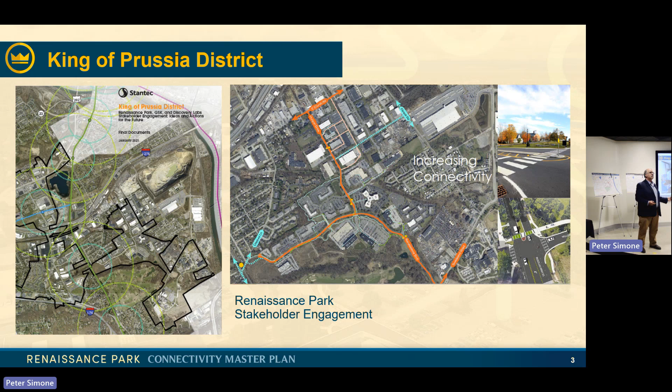If you're wanting to see the results of that study, you can go to our website at visitkop.com and click on the What We Do tab, then also click on Publications. There's a report there by Stantec, the consultant on that, and I recommend that you visit that.

One of the things that came out of that study was that they were interested in seeing Renaissance Park get a new brand, a new logo, new signage. So we worked with a focus group to come up with a new logo for Renaissance Park.

Which you have seen if you're coming in at any of the different gateways. We tried to reference King of Prussia itself through the design, but at the same time also allude to the vast number of different technological life science companies that make up this exciting area within King of Prussia.

This is the actual brand that they came up with, the logo. D2 Solutions was the name of the group that provided that. They're actually a company here in Renaissance Park, and they came up with it.

We also worked with Stewart Associates, a local landscape architecture firm, to come up with more planting beds along Renaissance Boulevard and the gateways. And we've been implementing those since 2020.

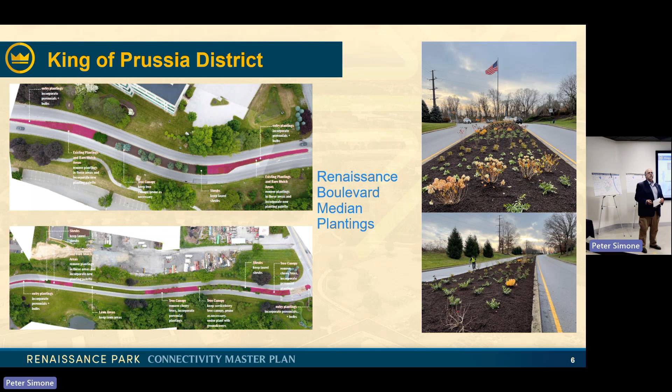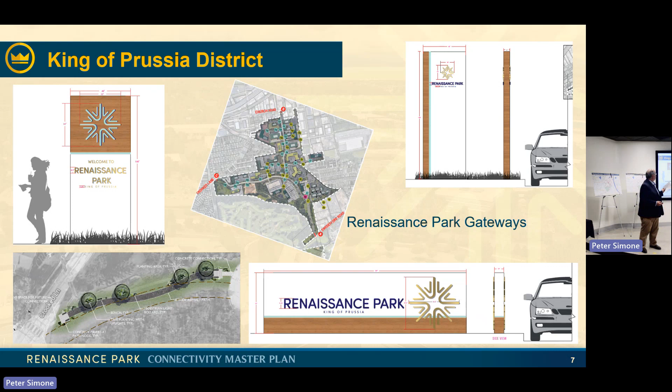And then D2 also came up with some additional signage for the area. We wanted to make sure that people were clear on where they were entering when they came into Renaissance Park, so we created the gateway signs that you see out there now.

Three gateways: the two gateways that have been there for a while, and then a new pedestrian gateway that we wanted to bring attention to, so that commuters coming in from the surrounding neighborhoods, or actually from Hughes Park Station, would know where they were supposed to be walking to.

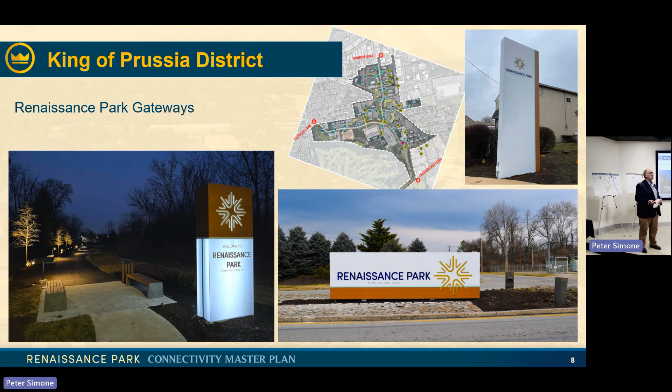The next phase of that signage project is going to be directional signage that's going to be built and installed within Renaissance Park itself, just to outline where the actual buildings are. It can get kind of confusing when you're going through the different driveways.

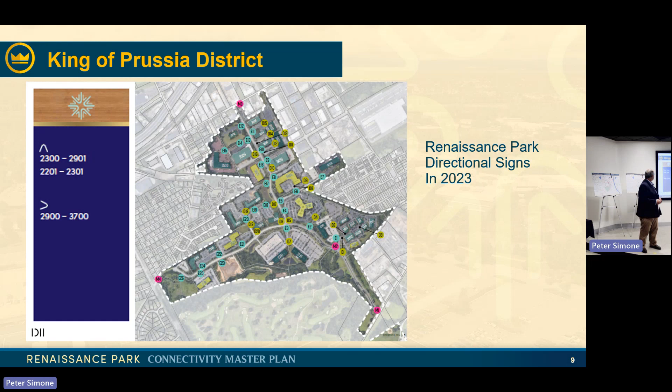And then we also hold a number of different special events and add some additional amenities. So the past few years, we've been having some food truck Tuesdays in Renaissance Park, as well as Wellness Wednesdays. And we also just installed a new beehive down by 2901 Renaissance Boulevard, and we'll be having some programming around that as well.

We also look at additional amenities that we can add to the area, including recreational amenities like an outdoor ping pong table. That's something that we've added in Moore Park, and it was very popular, with ping pong tournaments and pop-up beer gardens that we had at that location.

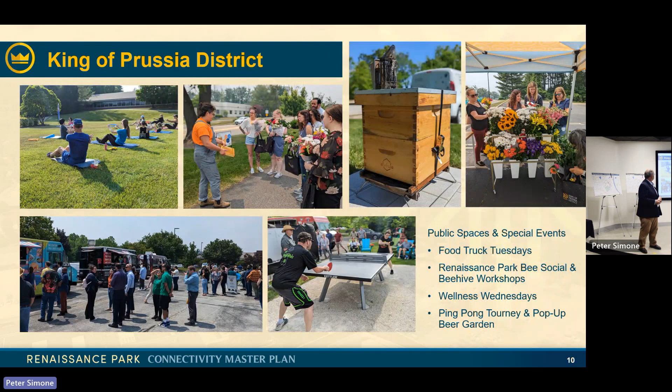So that's just a little bit of background. The other primary area that the stakeholders, the property owners in the Renaissance Park area, were interested in was pedestrian connectivity.

And so that's when we went out and hired Simone Collins to come up with a new connectivity study, to outline not only just for the property owners, but also surrounding neighborhoods, to find out what connections they would like to see made to Renaissance Park, throughout Renaissance Park, and how those connections can be made to the adjacent neighborhoods. So with that, I'll turn it over to Pete Simone, and he'll properly introduce his team.

Located just across the river in Norristown. We've been there since 2010. Some of the things we try to do in every project - we do a number of different types of projects. We've done over 120 or 130 trail and connectivity projects. That's a lot of what we do. We're sort of an old school landscape architecture firm. We do parks and trails and zoning and planning, site design, and all those good things. We did Wilson Park 20 years ago.

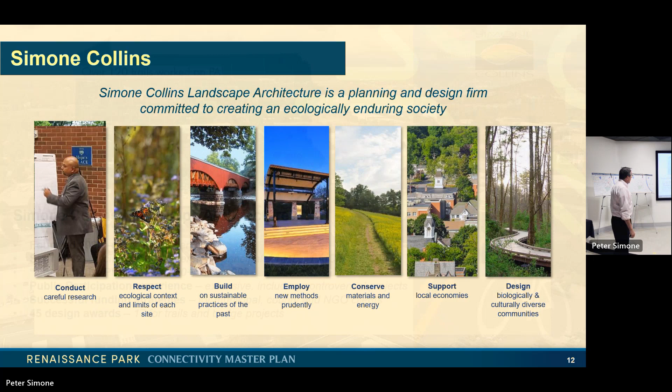This is, as I mentioned, we've done a lot of connectivity work. See the dots on the map, places that we've done. Shot of the bike lane in downtown Wayne that we did a couple of years ago. The Radnor Township project connected the school with the high school, with the downtown, and the existing Radnor Trail. Different types of trails tonight, so you understand - we all have the same understanding of what a trail is, because when you say trail, everybody thinks a different thing.

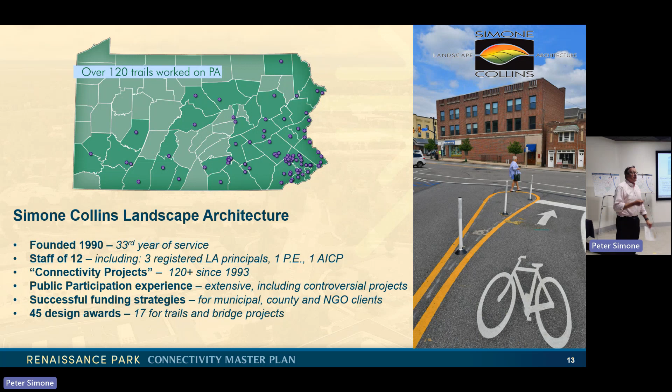And our partners, traffic planning and design - the traffic engineers are one of the most well-known regional traffic engineering firms. We work with them often, and they'll be looking at, especially for roadway intersections, how we're trying to get pedestrians and bikes over those safely. And as Chris mentioned, even though Renaissance Park is a limit, we're going to look outside those limits. We can't do this in a vacuum. It'd be silly to do a trail in the park or a sidewalk and not connect to something outside.

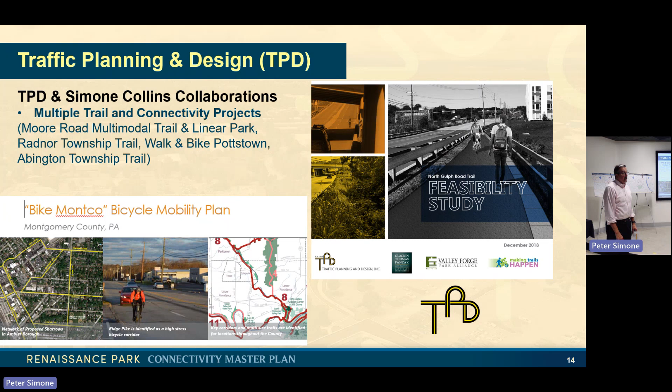And there's a lot of exciting things happening in the area. I should mention, every year Pennsylvania does a state recreation study, and by far, trails and walking are the number one most wanted facilities and the number one activity that people want to do recreationally. So it's happening all over the state. With that, I'll turn it over to Anita, she'll take you through the scope and a lot of other hopefully interesting things.

Good evening and welcome, and thank you again for coming out. At least it wasn't raining for us, right? That was our bet on how we get everyone out.

As Pete said, I'm a civil engineer, joining very talented landscape architects. And I've enjoyed working for Simone Collins for 2 years with great clients. I do have to put a plug in for the district, because this is the second project I've worked on with the same team, the Moore Road project. And there's an energy about the district, as there is about Upper Merion in general. So it's great for us to be back and participate.

The scope of the project - I'm going to take you through basically a plan, a connectivity plan, a plan that is used for planning. It certainly can't be built from, right? It's not a construction document, but it takes a look at where we possibly can make connections for pedestrians, for bicyclists, while taking into account the entire picture of Renaissance Park, which changes, which has its challenges, which is nestled in close to residences. It's such an interesting study - the more Geoff and I look at it, the more interesting it becomes. And we'll show you some fun slides about that. So the final plan is a connectivity plan.

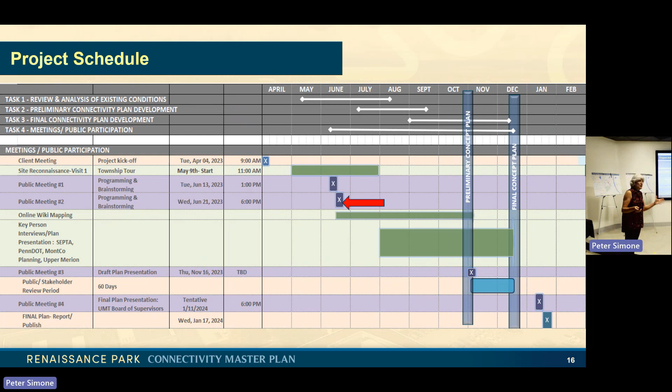Titled data and inventory - this goes back to the concept I mentioned about planning that's been done in this area. What you see on the bottom of this slide really represents the important documents to start with: the Upper Merion Comprehensive Plan. This is planning area 9, Swedeland, studied by Safe Routes to Transit by the Delaware Valley Regional Planning Commission. So Hughes Park Station is a key priority to us here in this study. They've looked at it - it's 2017.

As Chris mentioned, Stantec took all the ideas of the stakeholders back in January of 2020 to publish it in 2021, DII. So to get back to what the comprehensive plan says in Upper Merion: pedestrian connections, whether sidewalk or trail, should be enhanced in order to provide safe pathways for people moving in and out of the Swedeland area. Connections between Hughes Park Station and Renaissance Business Park should be improved, setting the tone for what this area has the potential to be.

It's such an unusual historic area - so many geological factors, railroad factors, just really interesting - going back to the roots of what it is and now making it work today, with the challenges property owners have, the economic times, and how they use their properties, the changes between commercial and residential. All of these are the factors affecting Renaissance Park. So this connectivity plan has to be sensitive to that, and sort of look at it from all angles with all the input from the stakeholders.

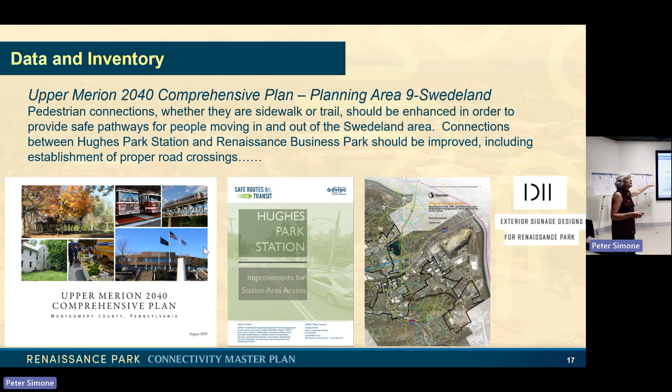Going back to the Stantec study that Chris mentioned - getting together all of the stakeholders for a three-phase study. What are the opportunities and the issues that they're facing as tenants, property owners, or residents? What are your ideas? What's the vision? What would you like it to look like? Number two - and what came out of it was a draft vision.

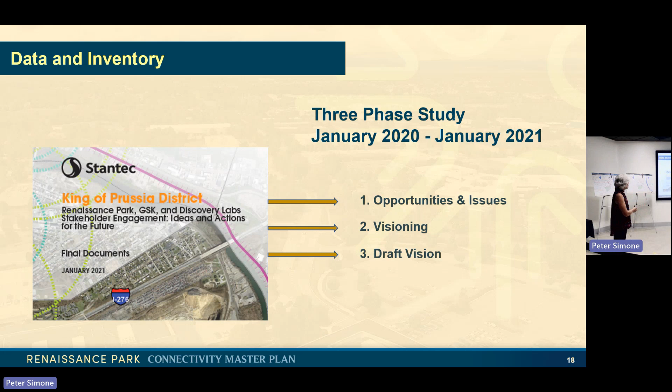It was good. It's a great report. I definitely encourage you to take a look at it because you can really see the specifics of it.

They also had the results of their public opinion survey, very detailed. Placemaking, as Chris mentioned, is something the district jumped on right away - the importance and beauty of place in the community, the importance of land use mix, and increased amenities were definitely very high on that survey. People's responses showed they'd like to see more things here, more food, more activities. The very last one, connectivity, was included as a large part of making those other visions happen - increased connectivity. Getting this project underway is that vision.

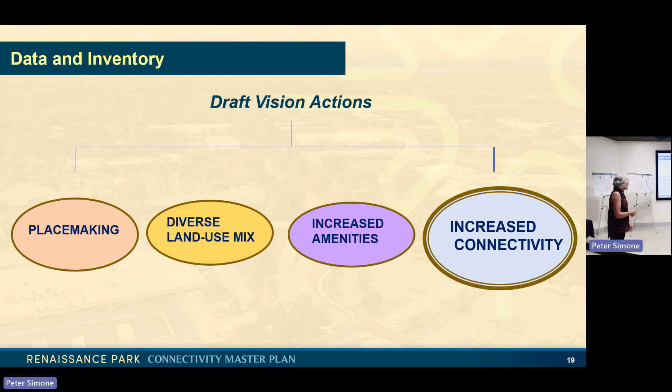Increased connectivity, again back to the Stantec report, 6 items, and there they are. Increased pedestrian infrastructure on Renaissance and Horizon Drive, more crosswalks and bus shelters, road connections into the district like Crooked Lane or other locations, extending Renaissance Boulevard across Swedeland and somehow over to River Road, and number 6, shuttle service.

I think this is really a good time to talk about what this study is that we're doing. Did you have a question? Talk through item E.

Absolutely, and again these were just - because I see like the bus shelters, there's quite a few around here. I'm just curious what drove that. Like 3 or 4, right? And that will change too, because SEPTA is proposing to change their routes, but within a very short distance there's a lot of those. Don't know the full story about that, but certainly.

Well, I guess just briefly mention that - updating the shelters. So the shelters themselves, not actually adding more, it was more of just updating them to something that looks nicer.

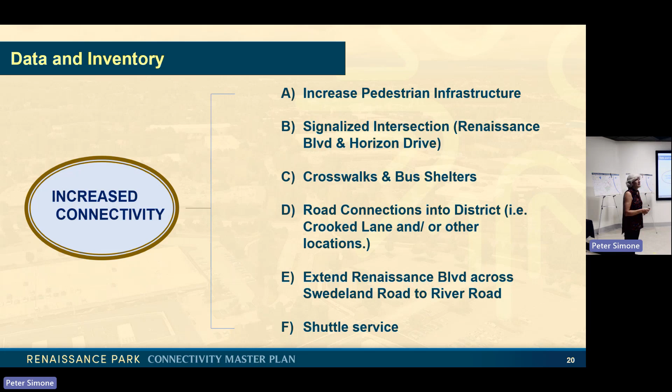We started off as a team, just an internal team, on our site tour on a beautiful day. We've had some really lovely days this spring. So I'm going to turn it over to Jeff now to take you through what really popped to us that day when we were out there, and that leads us into the rest of the discussion about our analysis, where we are, and Jeff will take us through a primer of how we're going to use a toolbox to look at Renaissance Park.

Jeff, thank you. I'm just going to dim the lights now that we've all had food and everything. How come I didn't get dim lights? You're gonna do it.

All right, so right now we're going to take a look at just a couple of photos of things we saw. I want to show you what we see as designers. Right here, what do we see when we came through here? We saw a really mature, well-groomed landscape. It's pretty, there are some really beautiful parts in there. Sure, it's a business park, but this is just a straight up photo taking - it's a wonderful, beautiful site. A lot of people like to utilize it for walking. People during their lunch breaks like to use those hilly, holy side paths that they have going on - really nice walking.

You'll see cyclists in there. We know people are riding their bikes. We also know that there's a lot of runners utilizing it. In fact, I think there's probably more runners than cyclists coming through here.

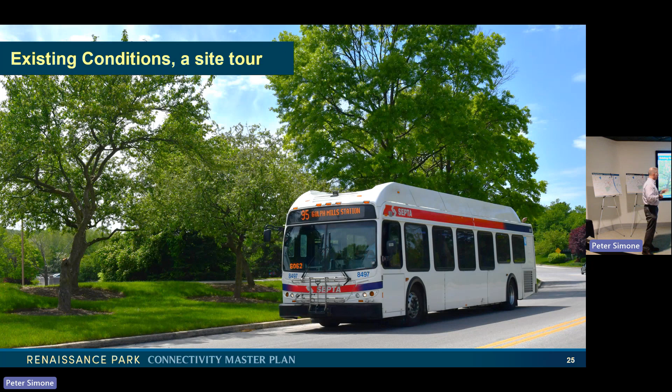Looking at the medians, once again, so much love. Someone's doing a lot of work in there, maintaining that landscape - beautiful roads, lots of trees, ever changing with this landscape.

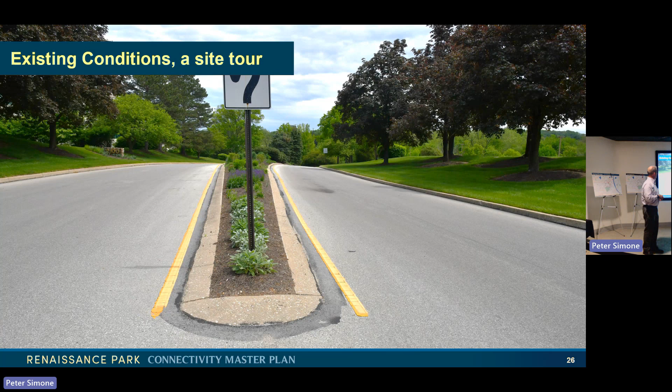Look at the new crossing. We were just talking about the crossing that you're so concerned about with the prior project we were discussing, but now we're looking at this crossing, how it is. At this point, this crossing isn't too great, but we learned that they are going to put in a pedestrian actuated light, so you can get across that street there, to get to Moore Park, to get to wherever you need to go, to get to Route 100, continue on into Philly, where that crossing will be addressed.

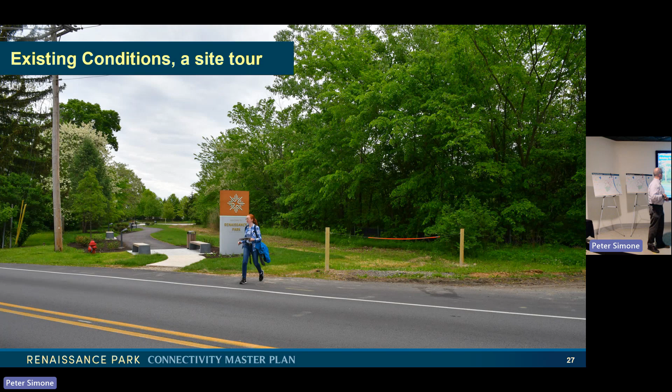Looking at some of the existing walkways within this project area, they're small, but they're fun. They don't meet ADA guidelines in some areas, so we have to think about the Americans with Disabilities Act. We want to make facilities for everyone. Right now, these are really small and very narrow - you could not get two wheelchairs to go side by side on these routes. But also, they exceed some of the slope needs and regulations that the ADA has set.

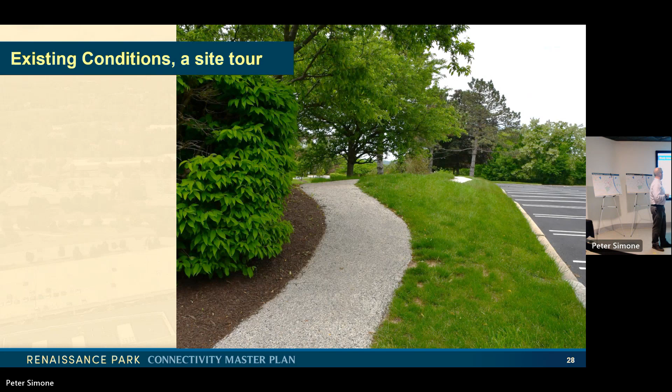We're going to take a look at what's going on in the project area. One of the neat things about this project area is that it's nestled in. You have 276, 76, you have the high-speed line, all nestled right in there. And to the east of that, you have the Schuylkill River.

Highlighting what is Renaissance Park - this is our project scope. When I say project scope, I'm talking about where our project area is, but we're not limited to that. We're thinking outside of it.

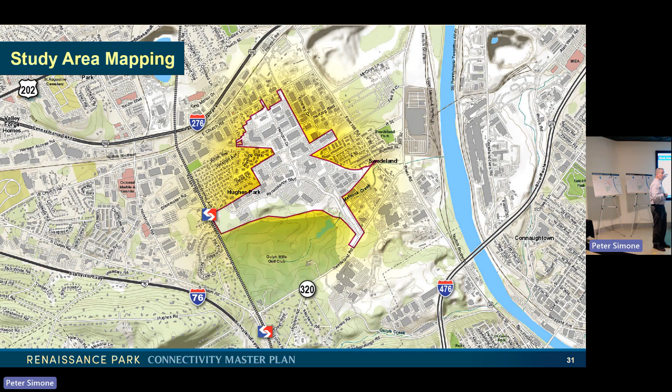So Church Road, technically not in there. Crooked Lane, not in there, but these are important connections because we know we have populations over in Hughes Park and Swedeland. How can we connect those populations? If people want to continue through and maybe someday get a connection to one of the best things going in this area right now - personally biased - Chester Valley Trail.

Now, with the Chester Valley Trail, that new expansion is right there. It is so close. In fact, I was on it last night running, trying to think, how can I run into Hughes Park? And I didn't have a good, clear answer because of Henderson. So we take a look and we think, well, maybe we need connections over in there. But also, right across the river, you have one of the best trails in southeast Pennsylvania. Personally, I think it's one of the best trails in the Northeast alone, the Schuylkill River Trail.

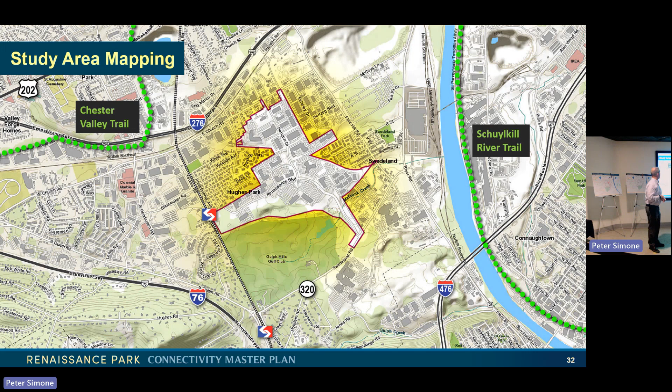But it's disconnected. How do you get to it? We can all drive to it, but could we walk to it? I don't think any of us really would want to. It's not very comfortable.

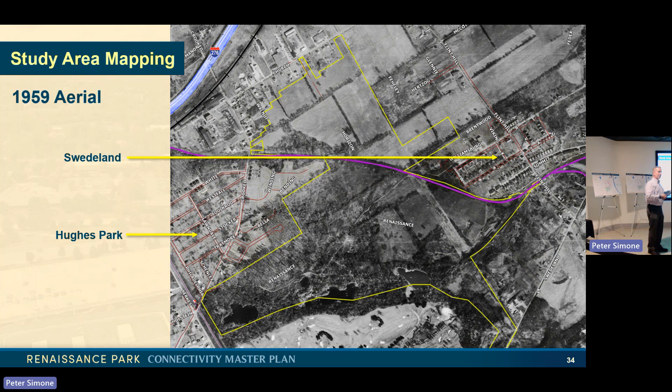So let's go to 1959. We take a look at Hughes Park. Once again, Hughes Park, it didn't take off. I don't know why. There's probably another great story with that alone. There were some more houses in there, some expansion into Swedeland. See that the quarries were still there, really old quarries.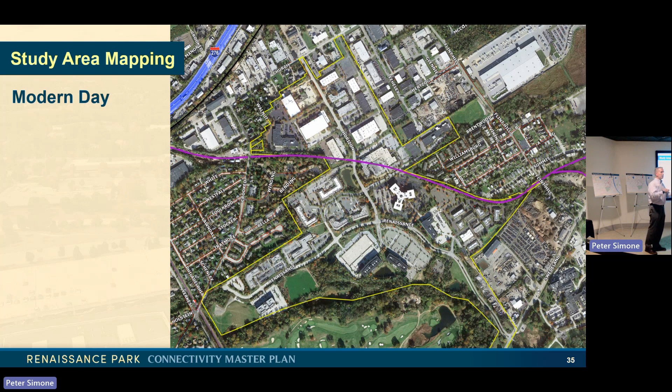Let's take a look at our mapping and how this mapping comes about. It's through GIS, and we get all these layers. We get layers from the county, who's represented here tonight. We get layers from PASDA, which is a state repository for all this data. And we start piling on here and we take a look at what's going on.

The darker areas are obviously the buildings. Then you see lots of parking. All this gray is surface parking. There is no lack of surface parking in this area. It is probably some of the densest parking in Montgomery County within this area. Of course, we still have the golf course. That didn't change from the 30s. That's an old golf course. It's been there for a long time.

What we do is we start taking a look at it and seeing what's in there. We highlight the state roads. These state roads are really important to take note because this is under PennDOT's jurisdiction. We have to meet PennDOT's design guidelines, and we want to because they are very good at what they do. They like to make things safe, not just for cars. They like to make things safe for everyone.

We also want to take a look at the existing sidewalks in here. There's some good sidewalks, not a lot, including the pathways in there. Some sidewalks over in Swedeland. But up in here, no sidewalks. It's a brand new spanking sidewalks up there on Horizon Boulevard and some nice connections right behind here.

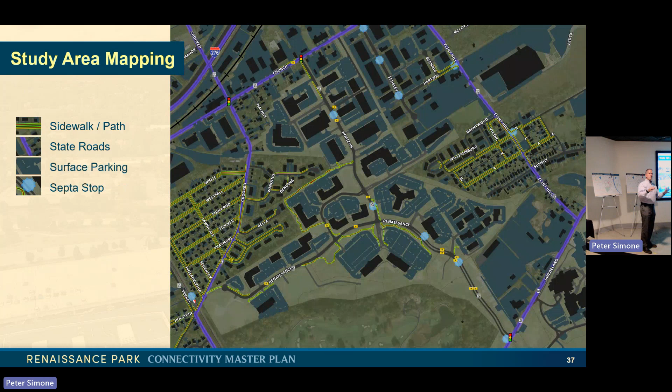So now we're going to go into the design world, so everyone understands where we are coming from and what we want to propose. And what we're going to do is what we like to call Trails 101, but it's multimodal things we care about: running, riding, walking. All these things are interconnected. This is how we look at it.

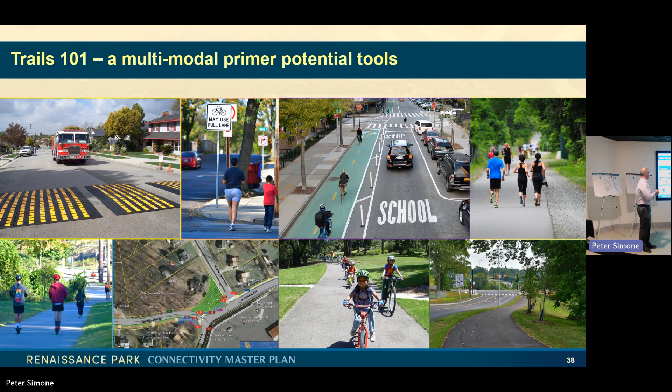So what we'd like to do is take a look at pedestrians. They're the #1 user group that we're looking at primarily. But the best one, children. We can design a facility for a child, we have designed a facility for everyone, because children think differently. They're more free spirited. They're not going to look out into traffic as quickly as we do. They're still learning, so they are our focus group.

But of course, shopping or even just out for a stroll - these are all the pedestrians we like to look at. Active lifestyles, we know that there's active lifestyles out here. People like to go out and stroll, or go out for a run.

And at the last meeting, I was joking about - I always love to joke about rollerbladers. I don't know how, but rollerblading is coming back. I was just riding this weekend, and I was out by Limerick on the Schuylkill River Trail. I saw rollerbladers out there. They're everywhere now.

Other people we're going to take a look at are the cyclists. We have the experienced cyclist. Tell you the truth, experienced cyclists, they're going to go wherever they want. They don't care, they don't need a facility. They are confident, they will just go and conquer anything they see.

We have casual cyclists. This is what I always refer to as my sister. She's not that confident, and I always use her as my litmus test. Would I be able to take my sister on this bike ride? Would she feel comfortable on this road? And that's really helped me from a standpoint saying, okay, she wouldn't like this because the comfort level, which you'll hear us say a lot, is not that great.

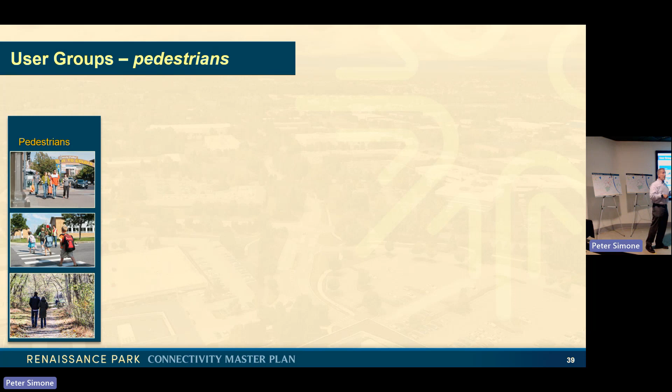And then, of course, children cyclists. If we design, once again, for a child, we have hit a home run. Where do you want a child to learn how to ride a bike? A lot of times people will say, I want to learn on a trail because there's no automobile traffic. But once they learn, where would you like them to ride? Trails, once again, comes up high, but buffered bike lanes also are very popular. We'll talk about it in a second.

And then, of course, we have other users. One of the big ones, dog walkers - pandemic, boy, do you see dog walkers everywhere now. Bird watchers, once again, one of these weird things that came about after the pandemic. During my lunchtime walks in Norristown, I used to never see bird watchers, but now, every week, I see a bird watcher out in Norristown. These people are watching for birds, and believe it or not, there's a peregrine falcon nest out there, and there's a bald eagle nest, all within a mile of Norristown. So that's why bird watchers are out there.

And of course, the big joke - I only put this in there because I'm from Buffalo, and I love snow - it's cross-country skiing. I don't think it's going to happen. Snow down here is just becoming more and more rare, but I'm keeping my fingers crossed and holding out hope that eventually we'll start seeing some cross-country skiers.

So the design guidelines are numerous. There are so many, there's dozens out there, and they all have these specific designs within each manual, and not one can fit every use. That's why we look at all of them. Once again, a really good one, designing streets for kids - they made the manual specifically for that. That's a really good one to look at.

But also incorporating on-road bicycle networks, FHWA came out with that, and that is a really good one for bike lanes. We'll take a look at that.

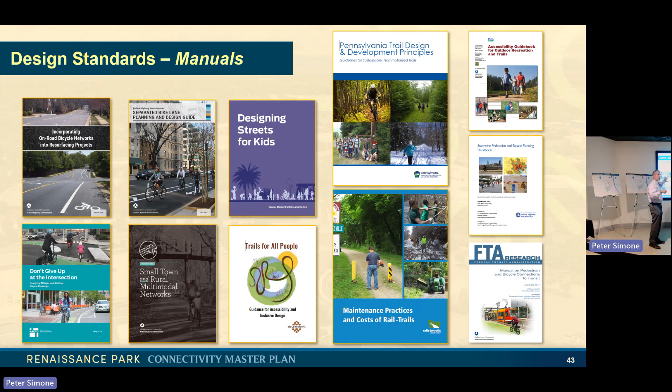But then we'll go into the main one. If there's one all-encompassing document, this is the one I'd love everyone to look at if we get a chance to hop online and see how we design. It's AASHTO. AASHTO is a group of engineers and designers that got together and made the design guidelines. They basically say this is what a bike lane has to be, this is what the regulations are. But they also take a look at trails, and they've set the standards for that.

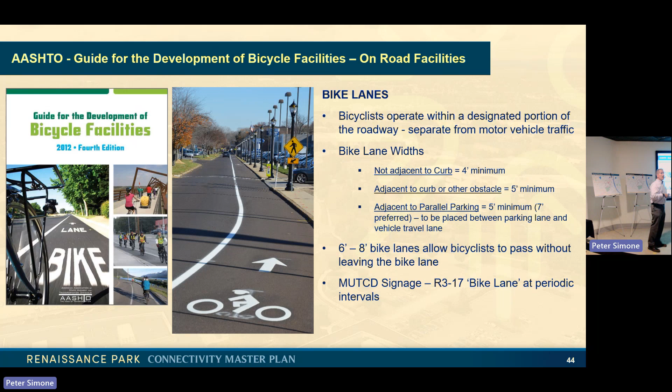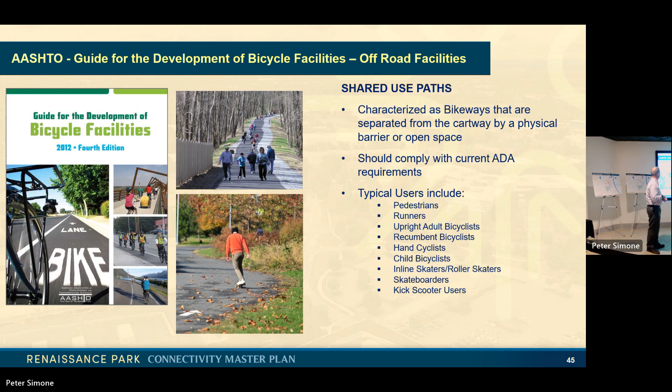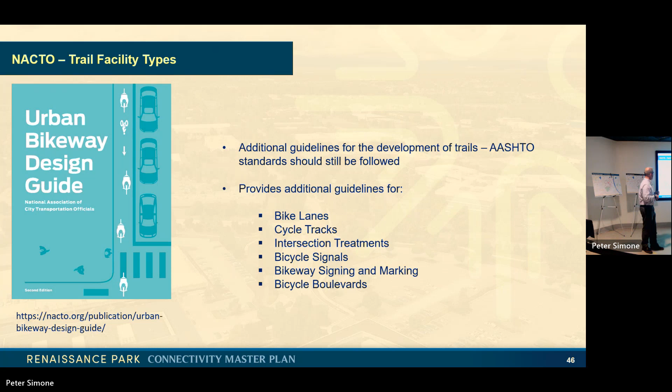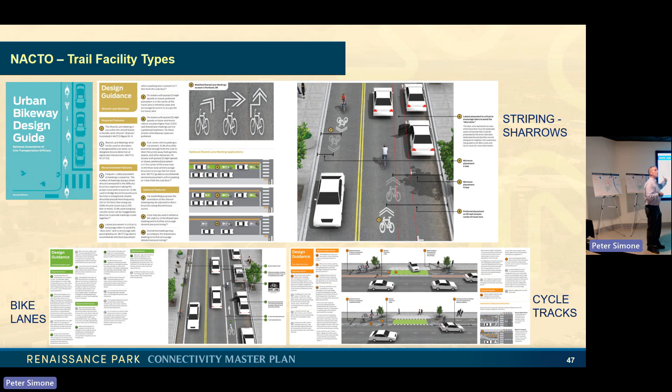The Urban Bikeway Design Guide — this one's really fun, done by NACTO. If you love pictures and drawings, this is very good to look at. It's brief, it tells you what's going on, and it has clear, concise graphics. We like to use this because they use a lot more cutting-edge designs. When this was done, a lot of it was kind of a 'wow' — it was informative, and you weren't seeing it a lot. But now you look at Philadelphia and say, oh, we got that, we got that, we got that. So we are catching on, we are moving forward with our facilities.

One of the things we do is propose a toolbox. These are items that we propose, and you propose where you want to put them within this design area. This toolbox is going to change — it's going to expand but also shrink. The odds are we're going to add more tools. And these are just some of the tools we're taking a look at.

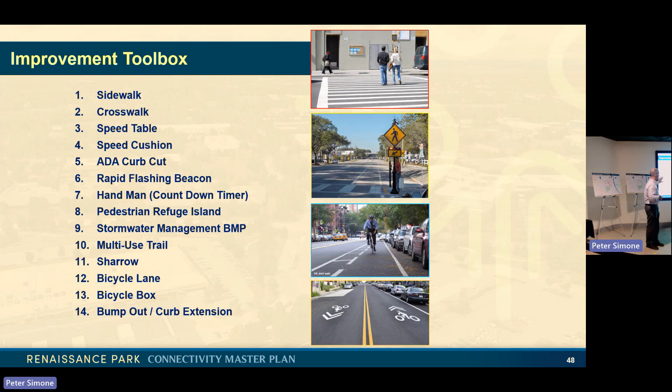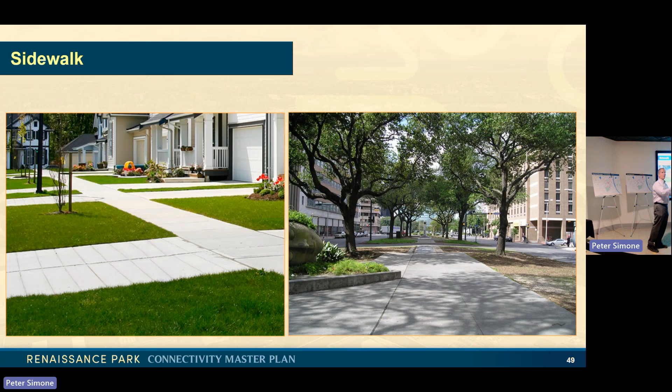First, foremost, number one, best tool — the tool we're really pushing for are sidewalks. As we saw in that one map, there's a lack of sidewalks within Renaissance Park. It's very tough to walk around here if you want to get from one end to another. Or even, as we heard earlier, during the pandemic, you want to go for a walk — how can you walk to here? Or if you just want to walk around in the parking lots afterward.

Crosswalks have all types of designs, but believe it or not, there are specific design guidelines. Take a look here at the left — this type of striping has a lot of names: piano keys, continental, zebra stripes. Those are the design guidelines for that. You have to have that type of crossing now if you use federal dollars.

And of course, if you use something fancy, you really want to celebrate that crossing — make it vibrant, change it up, make it stand out, so when you're driving, you do notice that. There are great ways to brand it, because now Renaissance Park has a really cool identity. Let's expand upon it and celebrate.

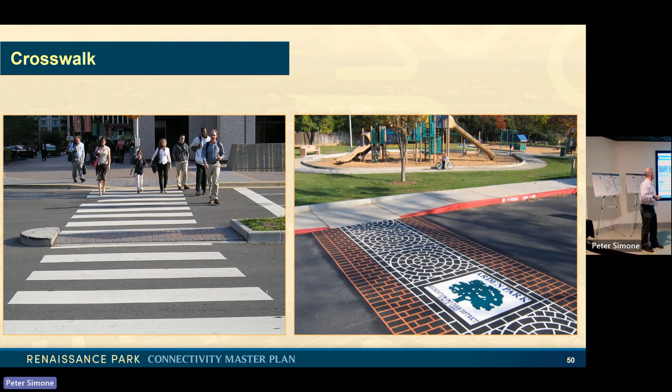Speed cushions are really cool — they're removable or permanent. One of the nice things about them is that they slow cars down without jarring your car too much. If you're in a 25-mile-per-hour speed limit and go over one at 25 miles per hour, depending on the speed cushion, you really don't feel them. They're very convenient, but also, if you need to fly by in an emergency vehicle, you can actually cross over them. One of the great things about that crossing over is cyclists can go right through them — it doesn't cause the jarring issue cyclists hate when hitting speed bumps or speed humps you've seen in years past.

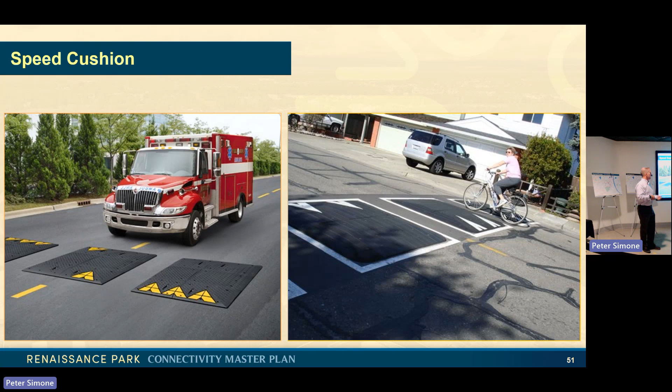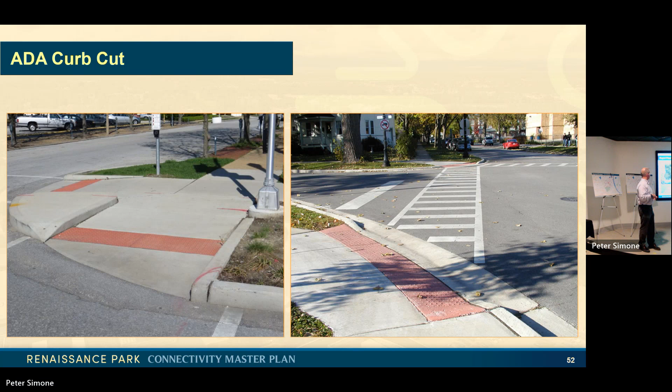Rapid flashing beacons, these are fun. When I was a kid, the crosswalk lights ran 24 hours a day. No one cared, you became so immune to them, you just didn't see them, you didn't notice them. Well now these are pedestrian actuated. You hit that button, they're high intensity, they're vibrant. When that lights up, you know someone's going to be in that crosswalk.

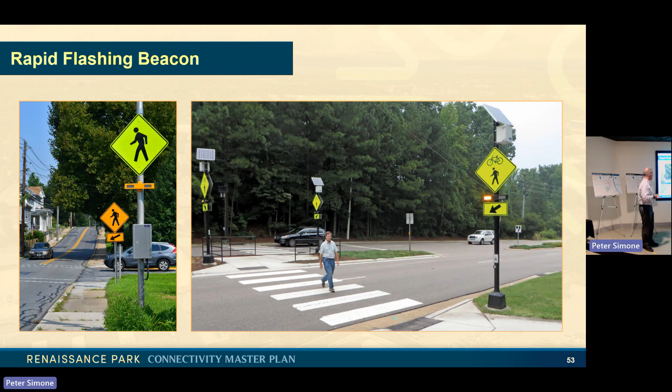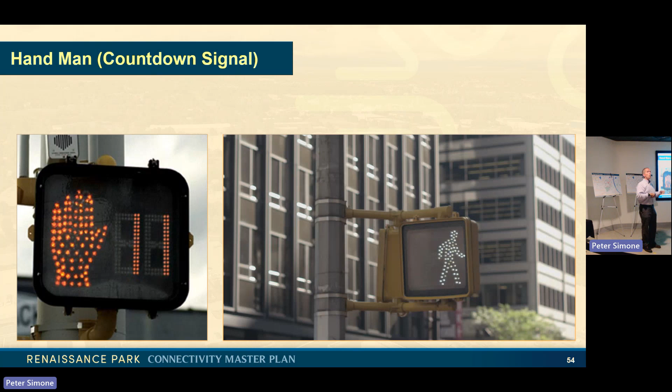Hand Man, the nickname given by PennDOT, it's actually a countdown timer. We all get used to them now. PennDOT implements them on their state roads. You hit the button, it tells you when it's safe to cross. Even now, they're audible, so it's not just for sighted people. If you're visually impaired and you can't see across the street, you can now hear the signal when to cross. These are really great tools.

Pedestrian Refuge Island. Every single time I talk about this one, because I use my father as an example. His knees are horrible, he has terrible knees, he does not walk like he used to, so he needs extra time. This is a great space for him to have extra time. He can get out to the middle of the road and take refuge when needed, especially when it's a long crossing.

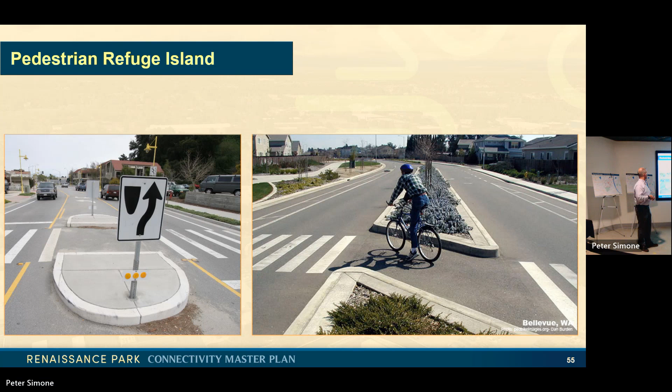Stormwater BMPs, BMP meaning best management practice. We all know that rainwater is becoming a huge issue, we are having runoff like no other. Areas like this that have lots of paving, how can we collect more of that runoff water? Could we incorporate them into some of these areas? We're gonna take a look at that.

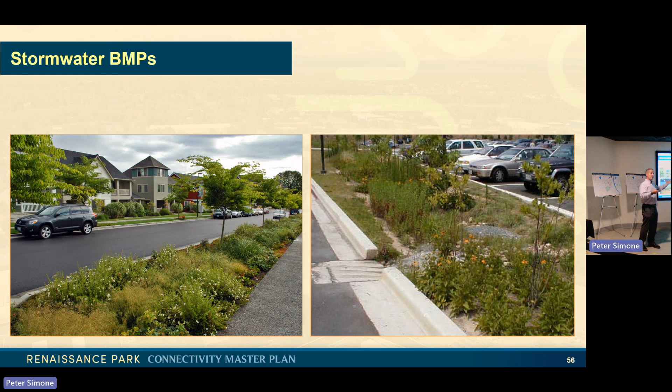Sharrows we don't use as much as we used to. They work really well on 25 mile per hour roads. We don't have those within this project area, but it's a tool that we're not going to discredit right now, we might have potential for it.

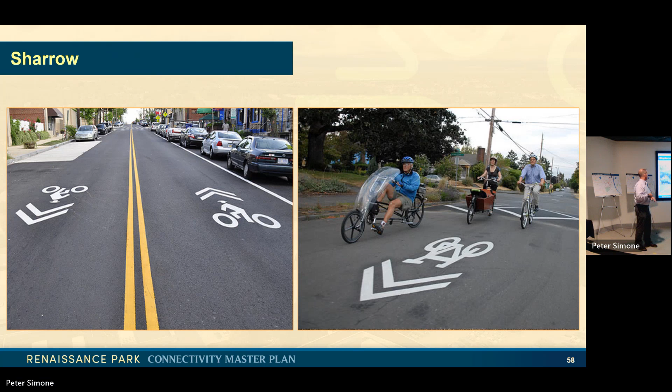Not enough room in some areas for a buffered area, but without a buffer, you can also put in just a normal bike lane. This gives cyclists their space. Also, one of the cool things this does, it helps calm down traffic. When you have wide roads and you can start cutting corners and going fast, you tend to speed up, but when it's narrow, you tend to drive a little bit slower.

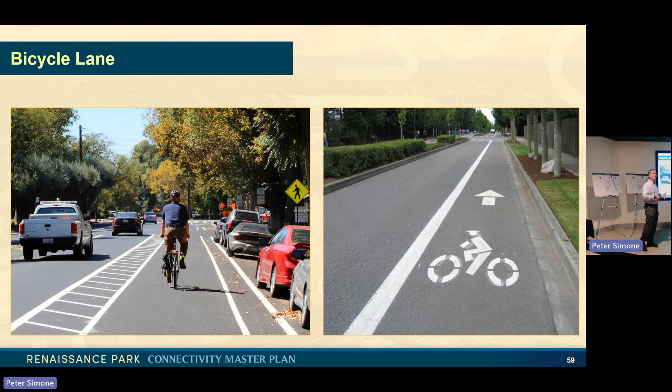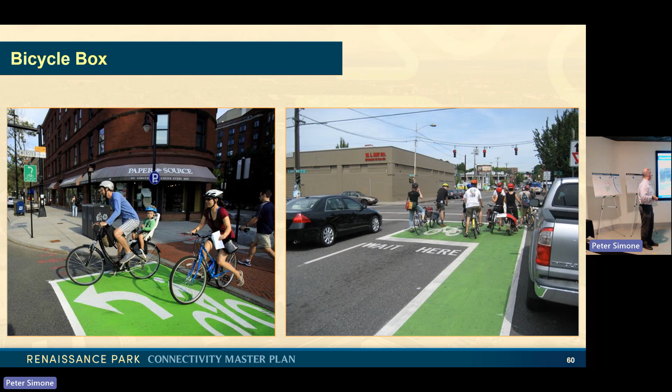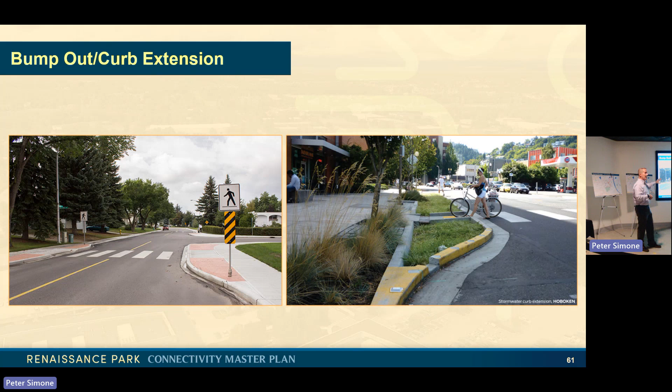Bump outs, curb extensions, something we'll take a look at. Not too sure if we can implement it because we don't know what we can do yet, we haven't designed it, and this is what we're trying to get to tonight. What ideas do you like? What would work well? Are there intersections that you feel are uncomfortable when you cross? Could this be a design solution for that intersection? So now we're going to go into the next steps, and we're going to start explaining some of the boards and go into discussions.

So I mentioned that part of the stakeholder visioning study was a very detailed public opinion survey, three different groups that responded. Again, take a look at them. They were great questions and great responses.

We too are going to use a public input tool called Wikimap. Don't be afraid at all, it's a fun thing where you can literally draw on the computer. You'll see the map of Renaissance Park and you can say, I'd like to get from here to here, then draw a circle around where I'm afraid to cross, or where it's kind of steep and cars wouldn't really see me. It's a great tool.

We really encourage you, if you could, there's a flyer Chris is holding up with the QR code, but we would love your input. You can even upload photos. It's a great tool for us, it can go right into our analysis. So we're asking if you would take a few minutes.

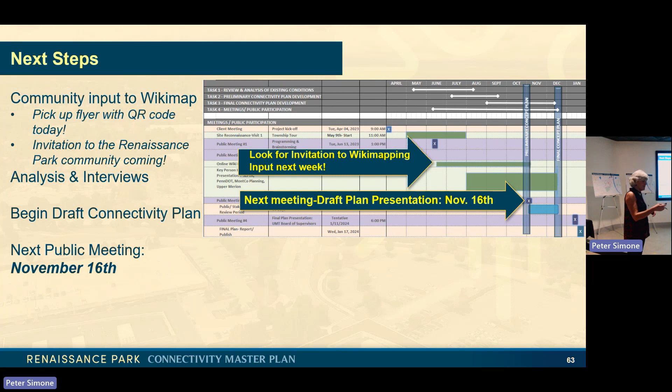So for anybody online, do we have anybody online? No. Right now, we would love to have you come up. We tried this at the last meeting and actually people were shy, they were very comfortable with their sweet potato fries and we couldn't get them to come up. But Jeff and I took their comments and wrote right on the maps.

Desired routes were important things for you, and where are the challenges? And we asked people to...

And so going through, it looks like slides 34 to 37, there's a lot of mention about Hughes Park and that area, but there's no mention, in fact it's not even on the slides, of Gulf Mills or anything down there. So is that part of your study? Has that been part of your study? Or are you only looking at Hughes Park and that area?

Because that is an area that, I think safe to say, different residents—and I'm part of the Gulf Mills Association—we are concerned because of the state roads leading there and the lack of egress into Hughes Park and quite frankly to Henderson Road. So where do we stand with that?

Right, so as Jeff said, the scope is the park itself, but the connections you're talking about are important to everybody who is in there as a resident as well, right? So our analysis—Gulf Mills Station, of course, is on that map—and certainly is not directly affected, but people want to get there as well, right? So the connections that Pete mentioned outside of Renaissance Park, how they would lead there and what would impact and what would be the challenges.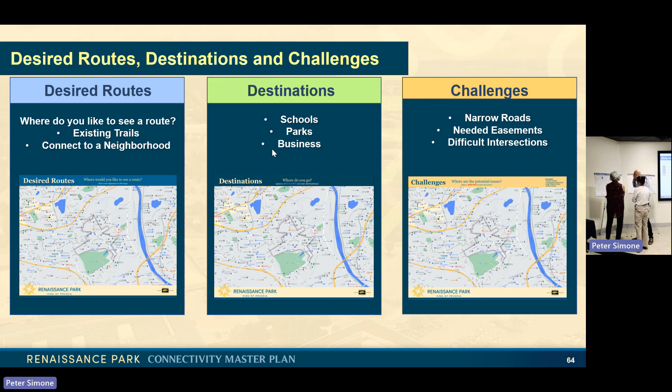So my point of being here is to make sure that 5 foot width on crossings and things of that nature could accommodate a UTV. I'm trying to get it for the municipality so we can rapidly go in and help our services there in need. UTV being like a utility vehicle, for fixed facilities, right next to the -- they make them for the fire service, any EMS service, or rescue, right?

So if we had a small fire in the building right next to this one, there's not a huge buildup -- railroad, easy to get there with a 90 gallon, and then on the other side, a million dollar fire truck that's not conducive to get there.

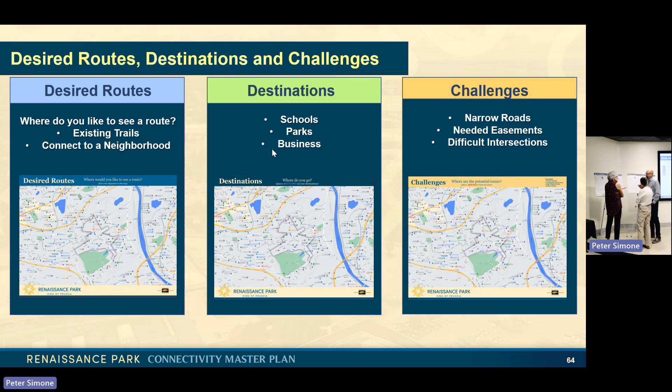Also, during COVID, they graded it down. If I can have a paramedic with a litter that's certified, safety and transport patient, it's important to make sure from public safety that we're able to get to those folks. It's peace of mind for the people.

So that's why I think this might be an outlier that they weren't thinking of. No, actually, it is something we came up with. If there's a stop at 76, I can't get to my house. I literally will go behind, park on Diana's Court, go through my neighbor's backyard to get to the house, and it's happened more than once.

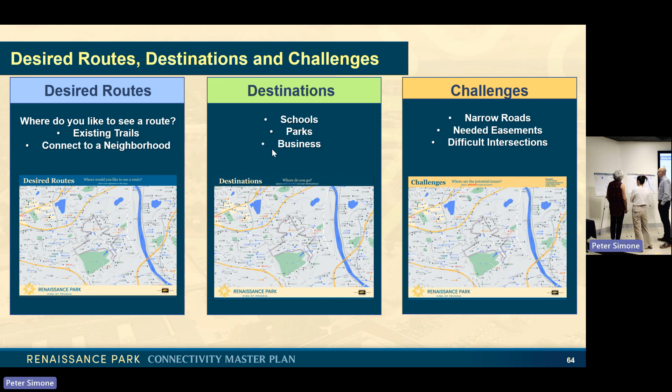So I'm with you, traffic is tough for us. I just retired, so for the first time I'm driving down -- oh sorry, it's like 11 o'clock -- and the traffic is just as bad as it was when I went out of work at 5 o'clock, because I was working from home. I'm shocked, I did not know it had built up to that level.